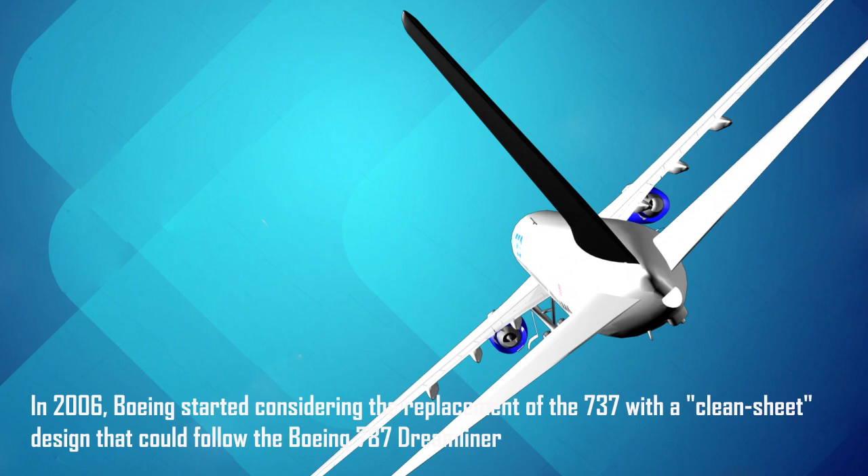Building of Boeing 737 MAX. In 2006, Boeing started considering the replacement for their 737 aircrafts with a clean sheet design. During that time, Dreamliner was in the anvil, and this new aircraft was supposed to follow that. The decision on this replacement was to be taken in 2011. The sales of Boeing 737NG, the MAX predecessor, was good. At the time of MAX launch, there was a backlog in excess of 3,000 aeroplanes. Then came the new re-engined Airbus A320.

On 1st December 2010, Airbus launched the 320neo with a LEAP 1A engine from CFM International, claiming fuel improvement of 20%. At the 2011 Paris Air Show, Airbus won about $72 billion worth of business for its 320neo for a total 730 aircrafts, setting a new record. At that time, Airbus had a backlog of 1,029 units since its launch.

On July 20, 2011, American Airlines announced an order for 460 narrow-body jets worth more than $38 billion. The order included 130 A320ceos and 130 A320neos and an intended order for 200 re-engined 737 with the CFM LEAP engines, breaking the long-standing monopoly that Boeing had with the airline.

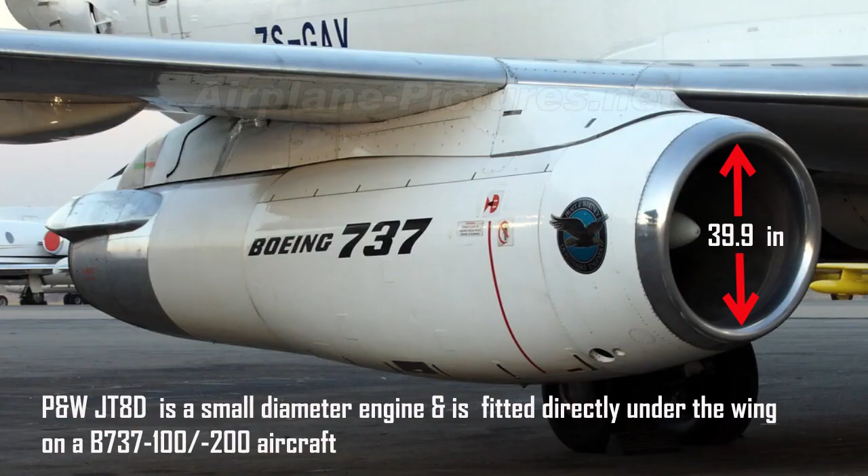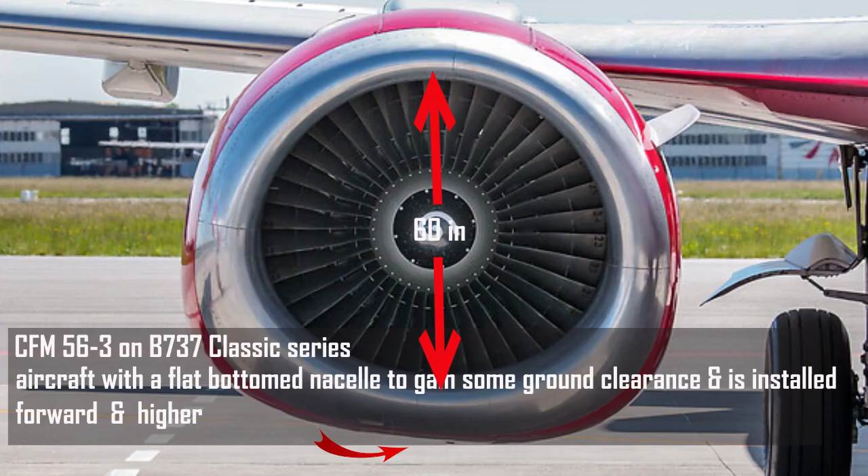In 1979, Boeing first faced the issue of installing larger diameter CFM 56-3 engines on its low wings when it re-engined the Boeing 737-100-200 into its classic series aeroplanes. The P&W JT8D is a small diameter engine and is fitted directly under the wing on a Boeing 737-100-200 aircraft. The CFM 56-3 engine on a Boeing 737 classic series aircraft has a flat-bottomed nacelle to gain some ground clearance and is installed forward and higher.

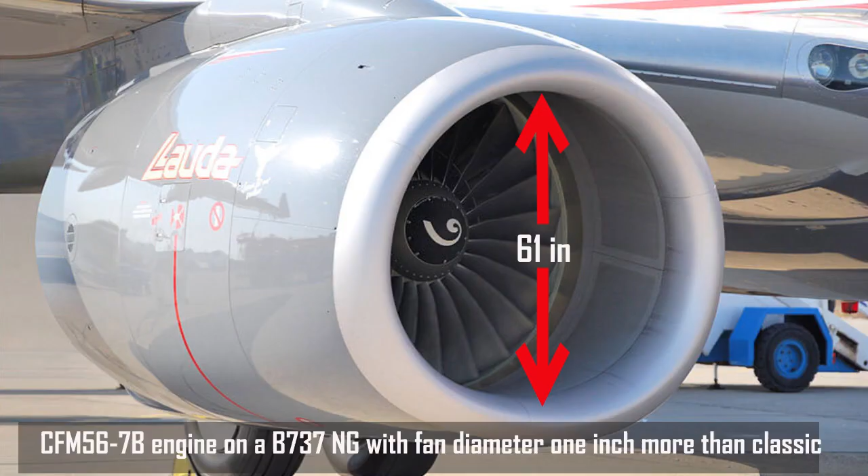For Boeing 737 NG aircraft, CFM 56-7B engines were selected. Its fan diameter is only 1 inch more than the classic engines, so there were no issues.

When Boeing wanted to install LEAP engines with a fan diameter of 69 inches on the MAX aircraft, they faced major problems. They did two things: the length of the nose landing gear was increased by 8 inches, and the engine was installed higher and much further forward.

Studies for additional drag reduction were performed during 2011 to catch up with Airbus in fuel efficiency. This included: first, a long and streamlined tail cone was introduced for natural laminar flow to reduce drag and improve fuel efficiency by 1%.

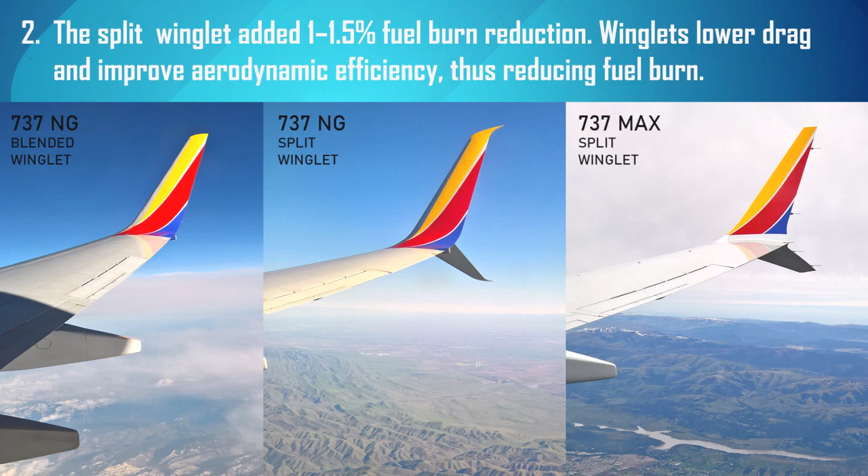Second, split winglets added 1 to 1.5% fuel burn reduction. Winglets lower drag and improve aerodynamic efficiency, thus reducing fuel burn.

Engine nacelle chevrons were introduced, which helped reduce engine noise by controlling how the core air mixes with the bypass air. This would allow several hundred pounds of sound insulation to be removed from the aircraft, making it lighter and more fuel efficient.

Fourth, the introduction of EBAS, the Electronic Bleed Air System, for cabin pressurization and aircraft ice protection, which will improve fuel burn.

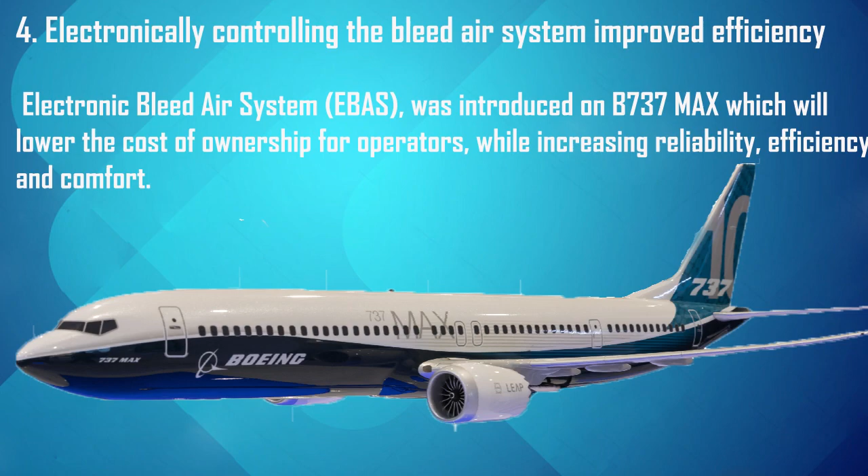Fifth, fly-by-wire spoilers. Boeing replaced the mechanical spoiler system with fly-by-wire spoilers in the 737 MAX to reduce weight and improve stopping distance.

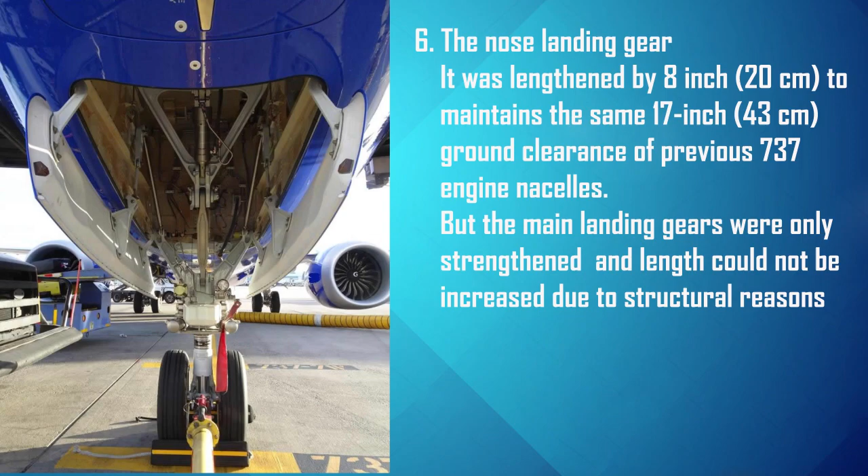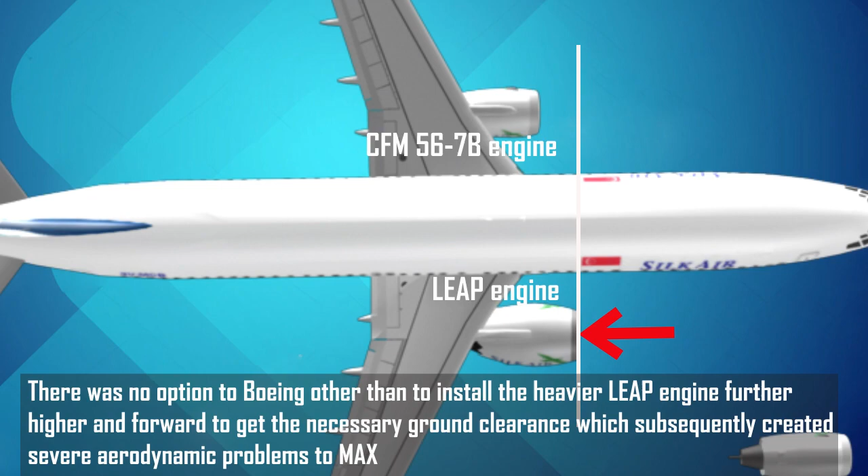The left side shows the NG engine and the right side shows the MAX engine. Boeing had no option but to install the heavier LEAP engine further forward and higher to get the necessary ground clearance, which subsequently created severe aerodynamic problems for the MAX.

In 2012, soon after launch, during internal tests, simulated high-speed wind-up turns showed aerodynamic interaction between the LEAP engine nacelle and the wing, creating a pitch-up tendency.

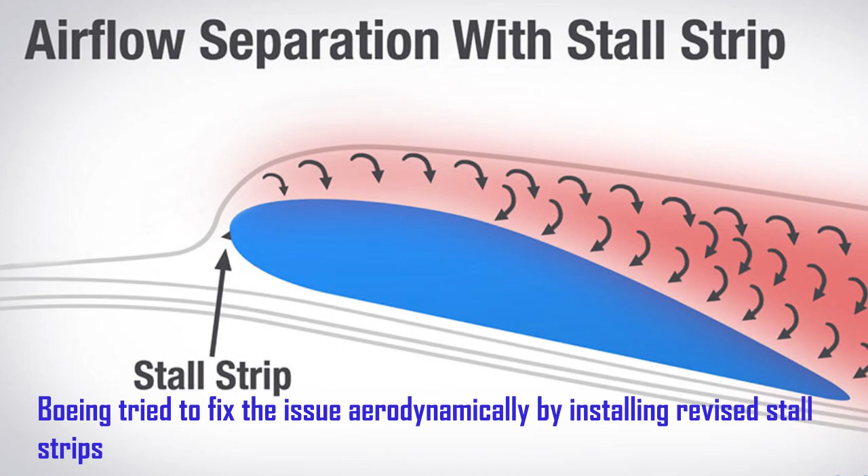Various remedial measures were taken by Boeing to avoid the pitch-up tendency aerodynamically. Boeing tried to fix the issue by installing revised stall strips.

Vortex generators: Boeing revised the vortex generator pattern. These can be seen installed on top of the wing to delay stall.

Vortilons were introduced, which allow flying at a higher angle of attack before stalling.

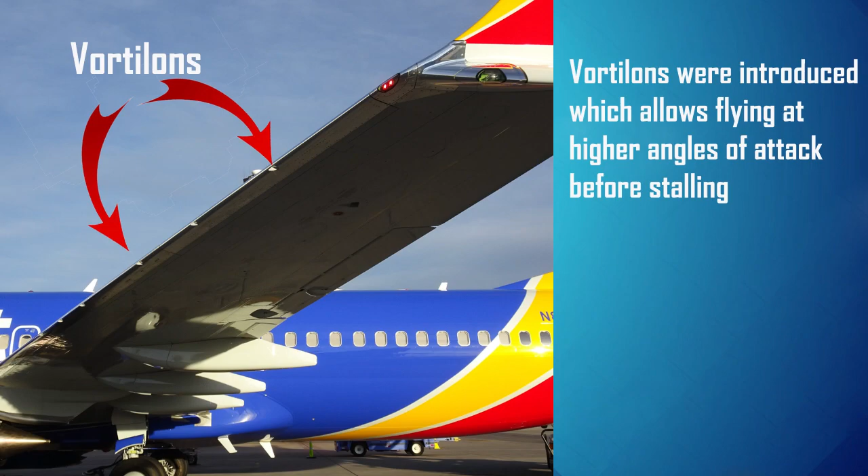A nacelle strake or chine was installed to prevent flow separation caused by the engine masking the wing at high angle of attack. This led to the introduction of the Maneuvering Characteristics Augmentation System, or MCAS.

Introduction of the Maneuvering Characteristics Augmentation System (MCAS). When all efforts failed to fix the problem aerodynamically, the solution Boeing arrived at was a piece of software, the Maneuvering Characteristics Augmentation System, or MCAS.

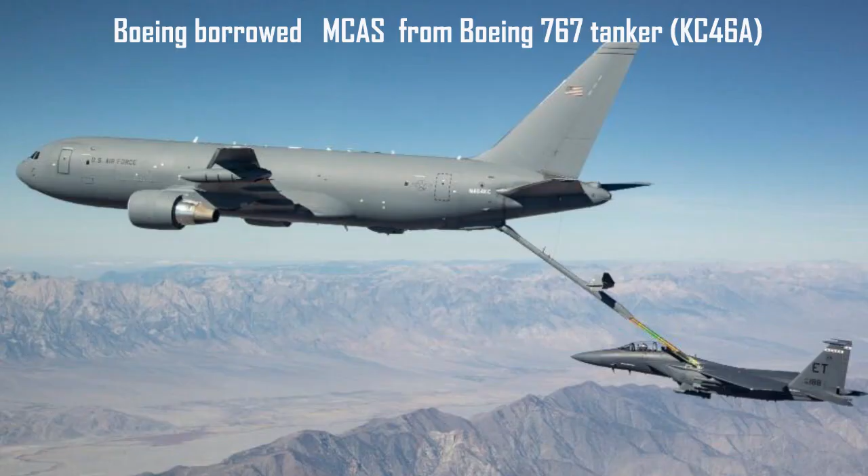Boeing borrowed MCAS from the Boeing 767 Tanker KC-46A. It is a safe system that has been used on the Boeing 767 Tanker for several years. The system was designed to operate only at extreme high-speed pitch-up conditions that are outside the normal operating envelope.

In 2016, flight testing revealed that the low-speed 1G handling was non-compliant with Part 25 of the CFR, the Code of Federal Regulations, dealing with stall characteristics.

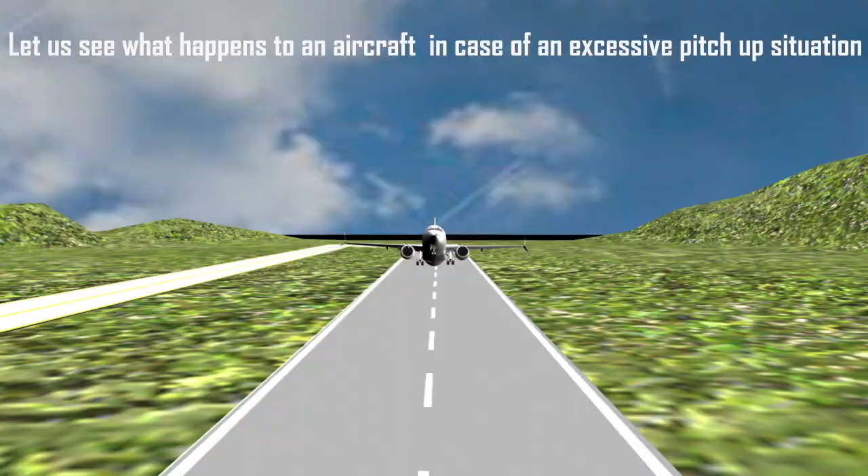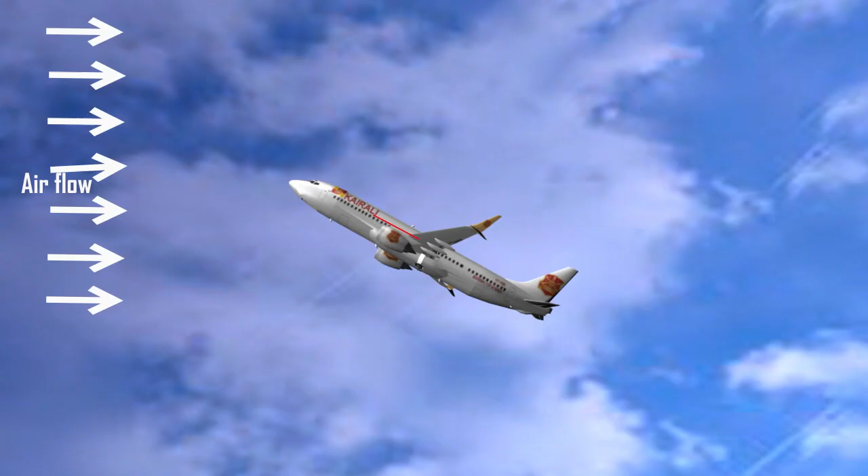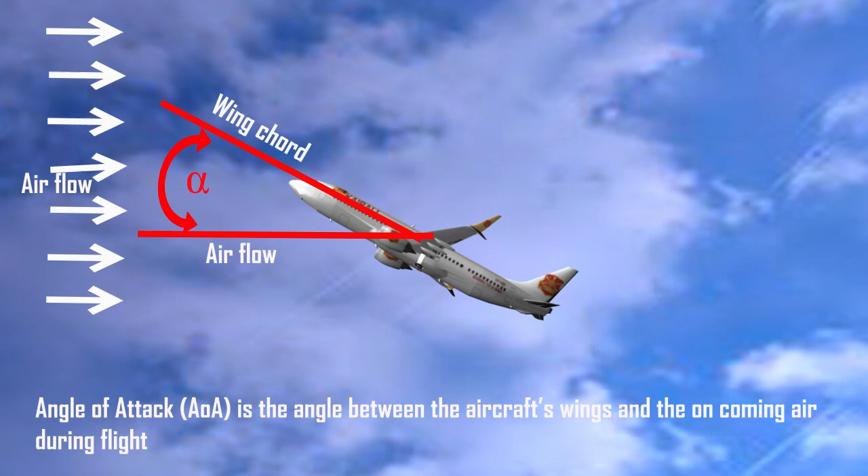Let us see what happens to an aircraft in case of an excessive pitch-up situation. The aircraft is climbing and the angle of attack is increasing. Angle of attack is the angle between the aircraft's wings and the oncoming air during flight. When the angle of attack is increased above a certain point, the airflow over the wings separates and the aircraft loses the lift produced by the wings. The aircraft stalls and falls out of the sky.

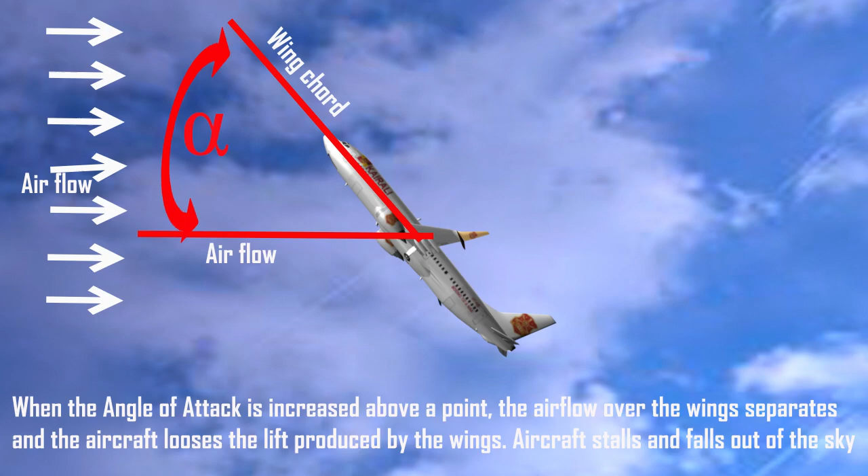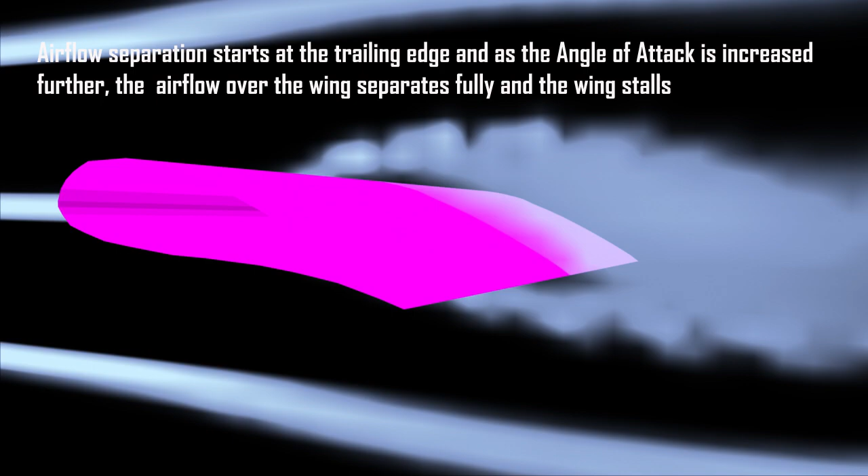This is the cross-section of a wing, and stalling is simulated here. Airflow separation starts at the trailing edge, and as the angle of attack is increased further, the airflow over the wing separates fully and the wing stalls.

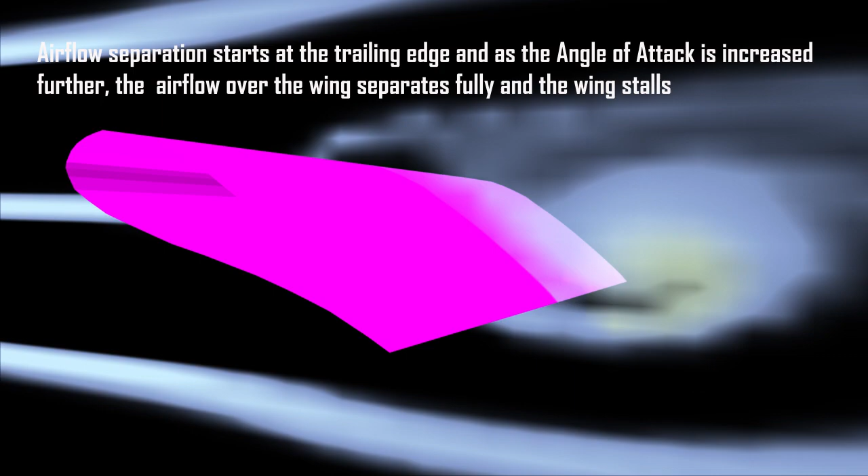What compelled Boeing to install the LEAP engine further forward and higher, instead of installing it directly under the wings by increasing the length of the main landing gear? Boeing had a valid reason for not increasing the length of the main landing gear.

It was also found that in some small areas of the flight envelope, such as approaching a stall and during higher G-force maneuvering, the new engine contributed to the control column feeling lighter.

All Boeing's attempts to counter this issue aerodynamically failed, and finally a software called MCAS was embedded in the flight control computer. Subsequently, two MAX aircraft were involved in catastrophic accidents due to the operation of MCAS after getting faulty signals from the angle of attack sensors.

The nose gear of MAX has been extended by 8 inches to increase the ground clearance for the larger diameter engines. There was no difficulty in increasing the nose gear length as it retracts forward.

The main gear sits between the wings and retracts inward into the wheel well cavity in the lower fuselage. Lengthening the main gear would require shifting the gear attachment points outward, otherwise the lengthened gear will not retract into the wheel well cavity. Lengthening the main gear struts means an almost complete structural redesign of the main wing structure, with consequences on cost, lead time, recertification, and weight increase.

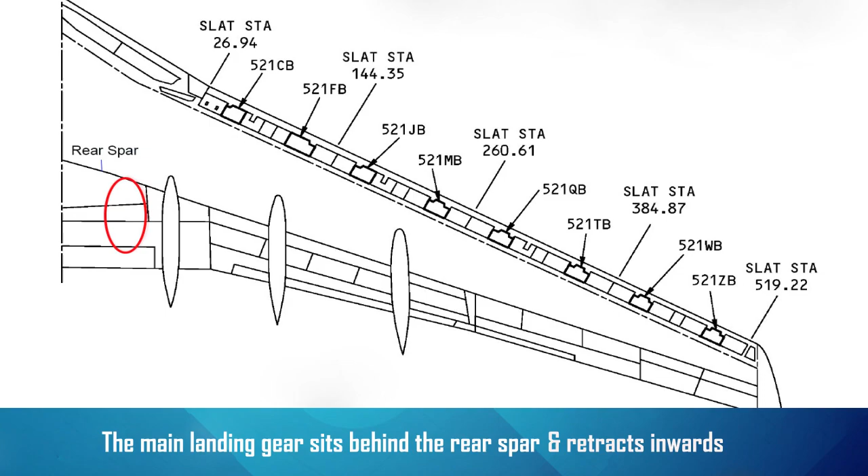The main landing gear sits behind the rear spar and retracts inwards. It is attached to the main landing gear support beam and to the wing rear spar. This shows the original landing gear position and retraction.

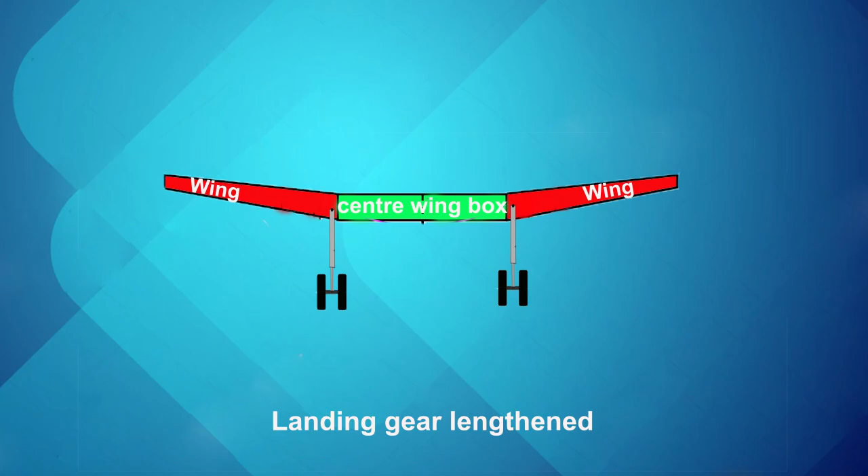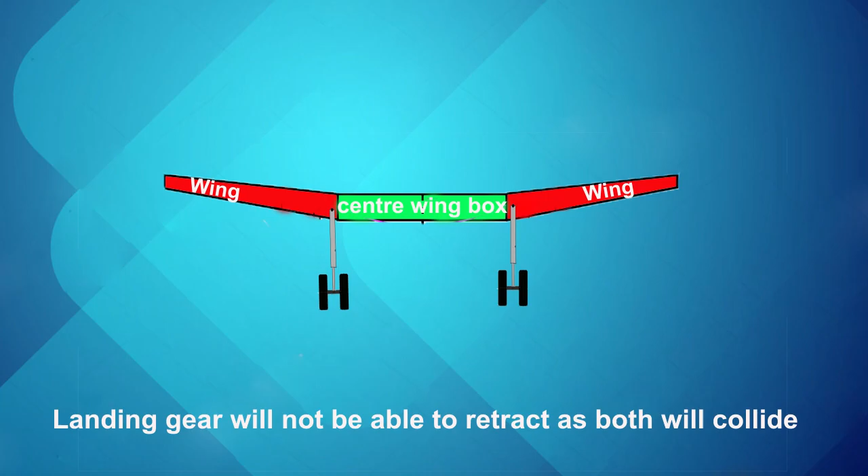Landing gear is lengthened now. Landing gear will not be able to retract as both will collide. Hinge points are moved outwards and retraction is possible now.

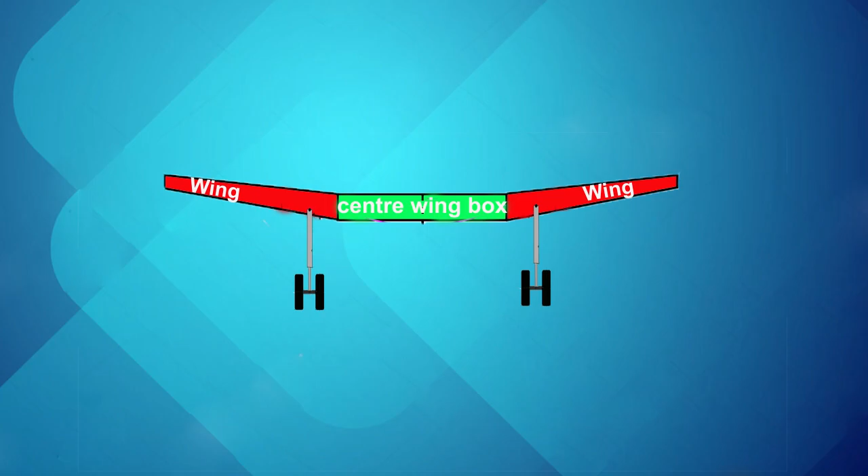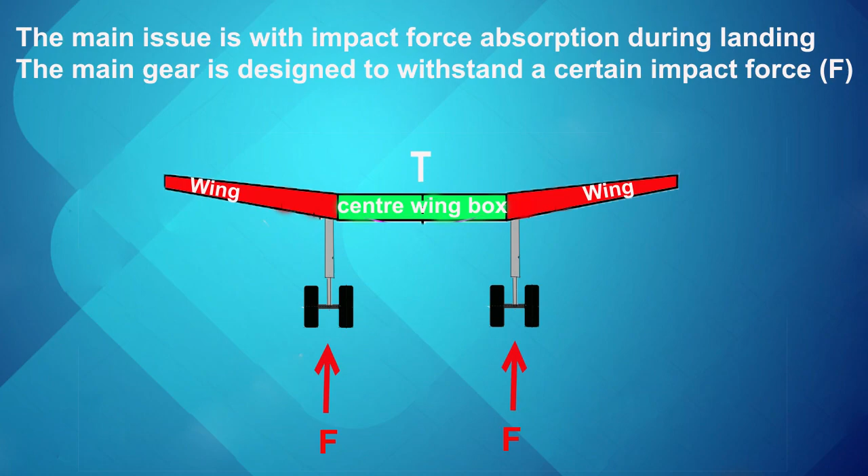The main issue is with impact force absorption during landing. The main gear is designed to withstand a certain impact force. If the distance from the center is increased, the impact torque T on the center wing box increases proportionally. Strengthening the center wing box has implications on the weight and the wing root thickness.

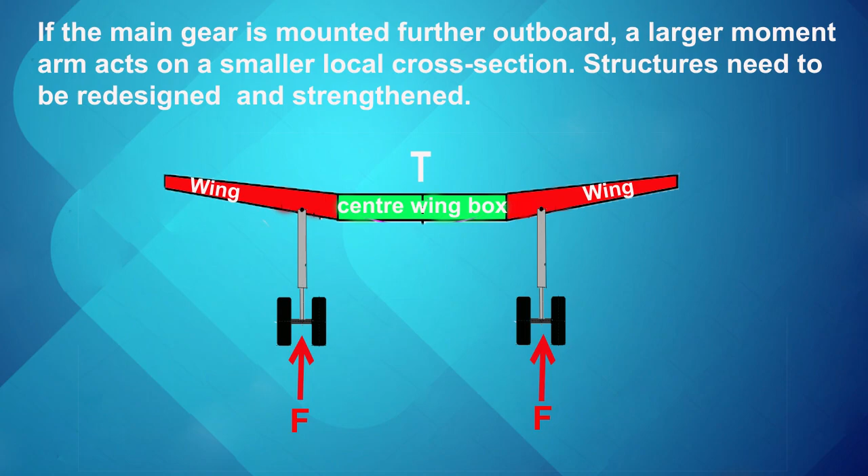If the main gear is mounted further outboard, a large moment arm acts on the smaller local cross-section. Structures need to be redesigned and strengthened. Redesigning the wing fuselage intersection is a major design effort in cost and delivery time. Boeing could not afford both, and hence lengthening of the landing gear was not feasible.

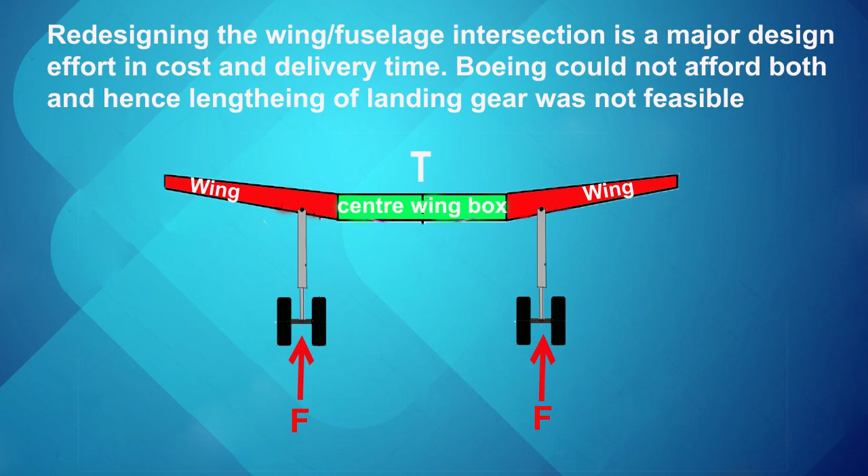In 2016, during the flight test program, it was found that in some small areas of the flight envelope, such as approaching a stall and during higher G-force maneuvering, the new engine contributed to the control column feeling lighter. For the control column to have a higher pull force feel in these flight regimes, Boeing decided to include an additional flight control law in the STS, part of the flight control software that provides required control force feel to the pilot. Thus, MCAS function was added.

STS, speed trim system, is part of the flight control computer and is used to augment the airplane's speed stability during certain low speed, high thrust flight conditions like takeoff or go-around. It does this by moving the horizontal stabilizer during manual flight.

MCAS is a software embedded in the flight control computer to automatically command the airplane's nose-down stabilizer to enhance pitch characteristics. Duration of the MCAS command is a function of angle of attack and airspeed. MCAS authority over the horizontal stabilizer was increased from 0.6 degrees to 2.5 degrees per cycle. This was needed because the original scope of MCAS was limited to high speeds; when it was adapted for low speeds, the change was required.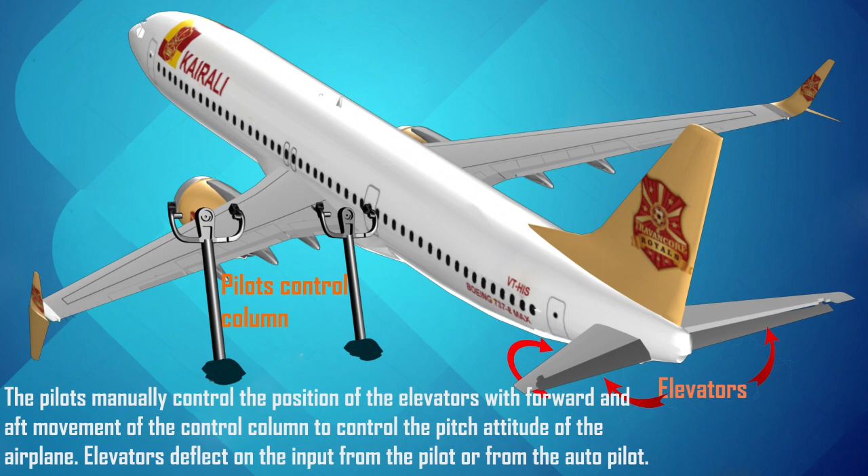Pilots manually control the position of the elevators with forward and aft movement of the control column to control the pitch attitude of the aeroplane. Elevators deflect on inputs from the pilot or from the autopilot. The trimmable horizontal stabilizer, or THS, assists the elevators and can be moved to certain angles both up and down. Elevators are also mounted to the THS and move along with it. The pilot can operate the stabilizer electrically using the control wheel trim switches, or manually move the stabilizer through cables by turning the stabilizer trim wheels.

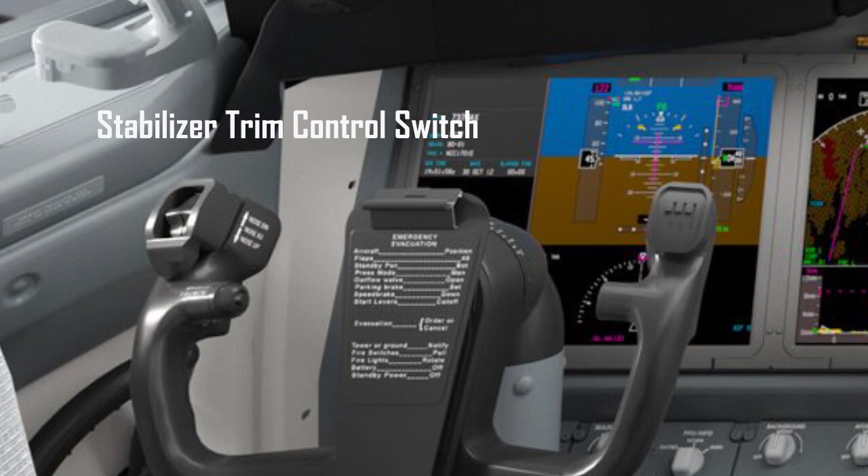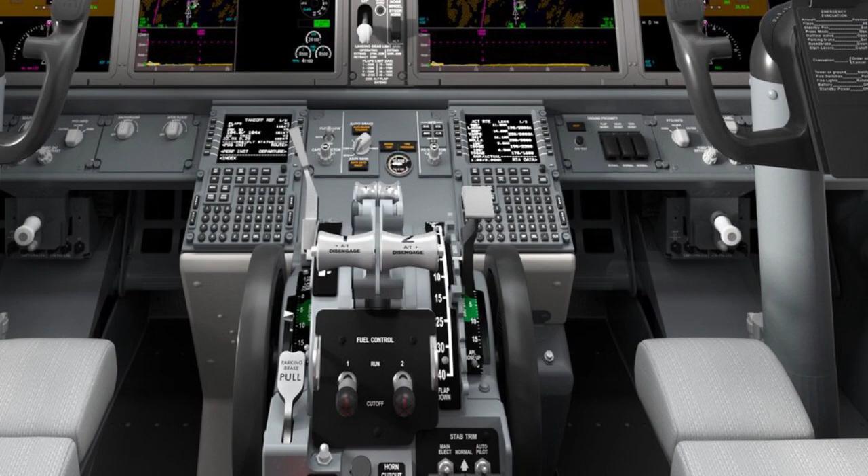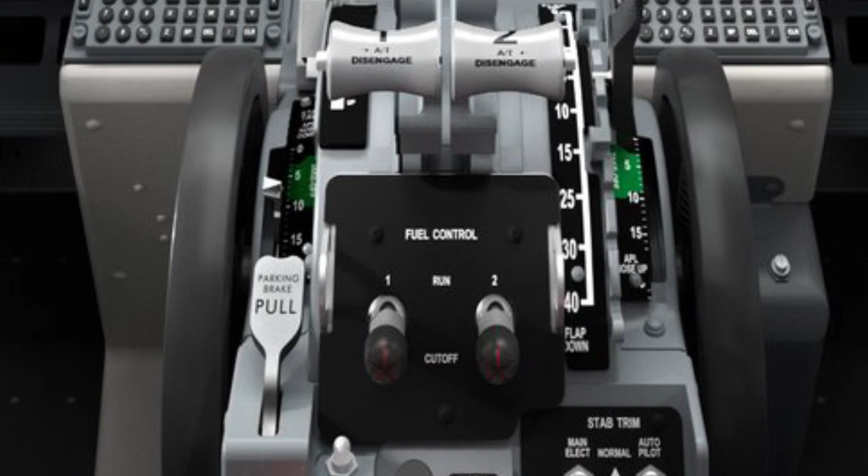We will go inside the 737 MAX flight deck, showing the stabilizer trim control switch, the stabilizer manual control wheels, and the stabilizer trim cutout switch.

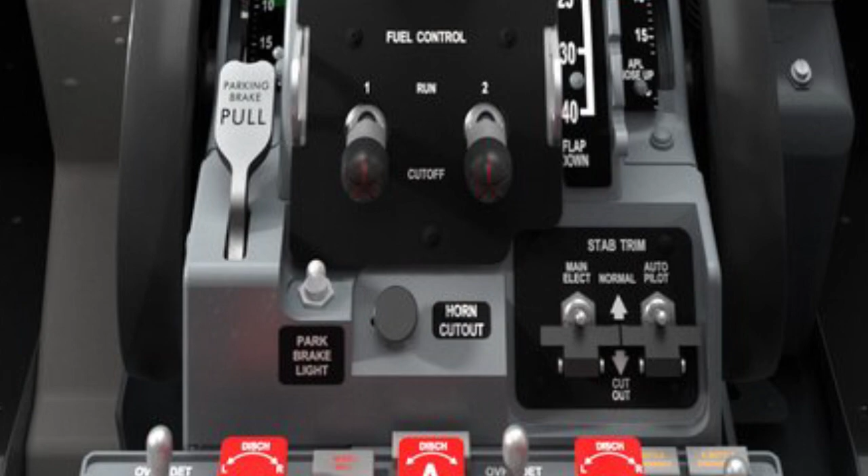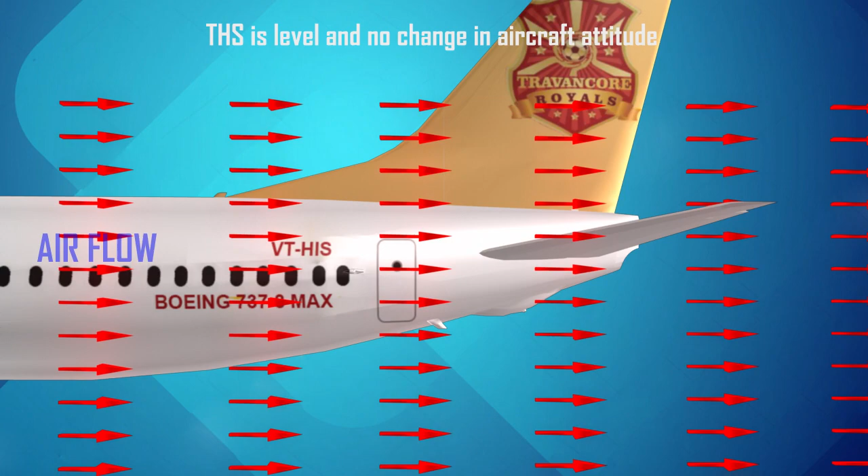The trimmable horizontal stabilizer, or THS, is moved by a jack screw located in the tail section of the aircraft. The airplane's longitudinal trimming is achieved with the help of the THS, which trims the airplane to maintain a particular attitude, such as straight and level flight, a constant climb, or a constant descent, without any control surface input. This is achieved by adjusting the THS, thus reducing the pilot's workload. The THS is adjusted by the pilot or by the autopilot as required. When air flowing over the stabilizer is level, there is no change in the aircraft's attitude. If the THS is deflected upwards, the airplane's tail goes up and the nose goes down.

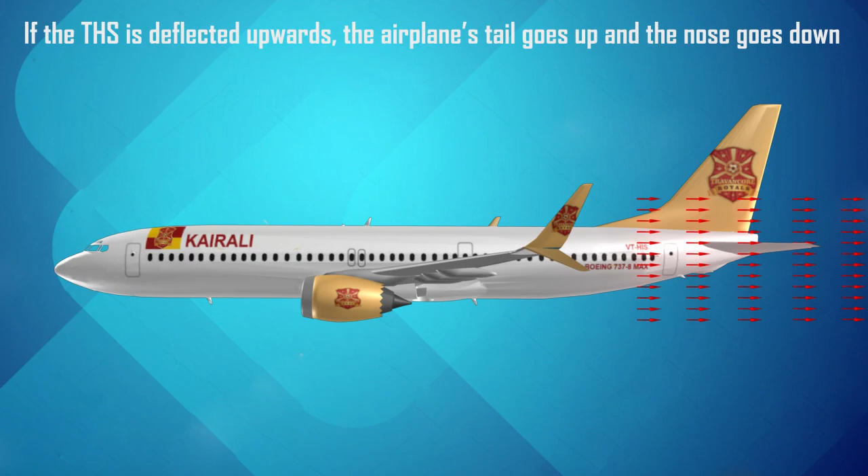If the THS is moved downwards, the tail goes down and the nose goes up.

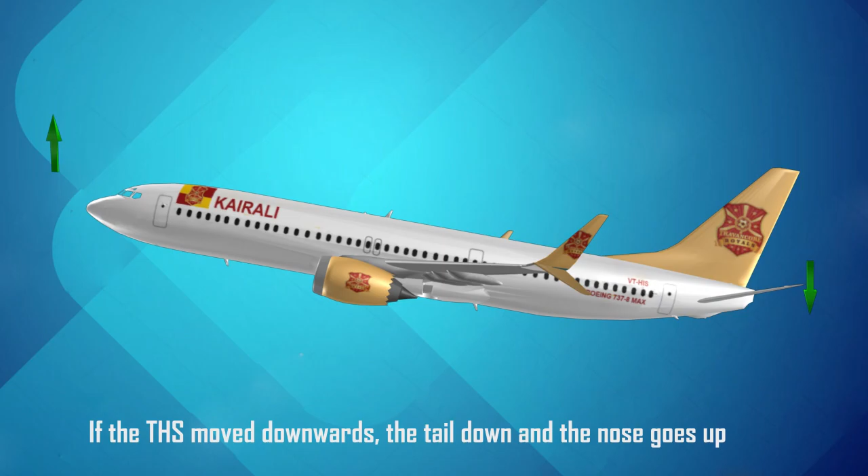The MCAS function becomes active when the angle of attack exceeds the threshold based on the airspeed and altitude. Let us see how the angle of attack sensor works. In level flight, the angle of attack sensor vane will be level as it aligns with the airflow. When the airplane's angle of attack is increased to a high level, the sensor's vane rotates, and this signal showing impending stall will trigger the MCAS.

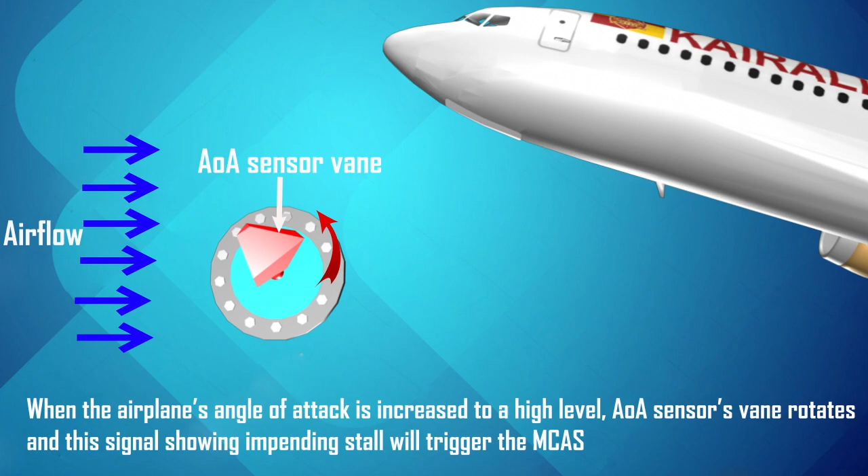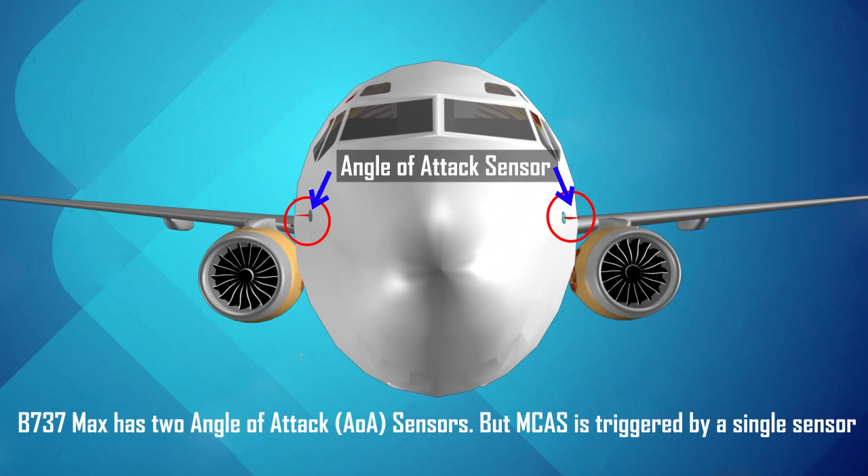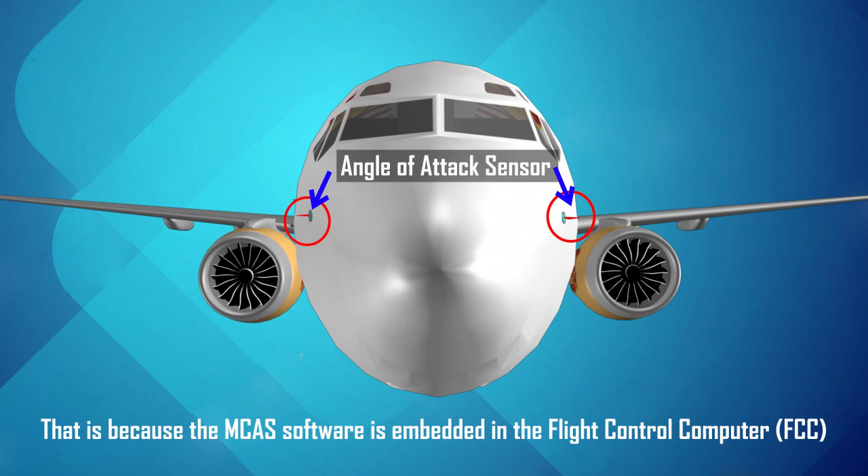Boeing 737 MAX has two angle of attack sensors, but the MCAS is triggered by a single sensor. This is because the MCAS software is embedded in the flight control computer, and only one FCC is active at a given flight. The FCC flip-flops between flights: in the first flight of the day, if FCC 1 is in operation, the next flight it will be FCC 2.

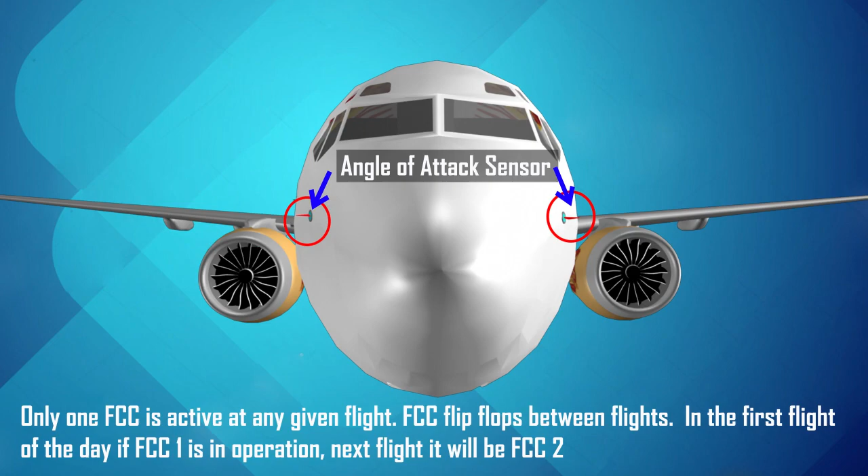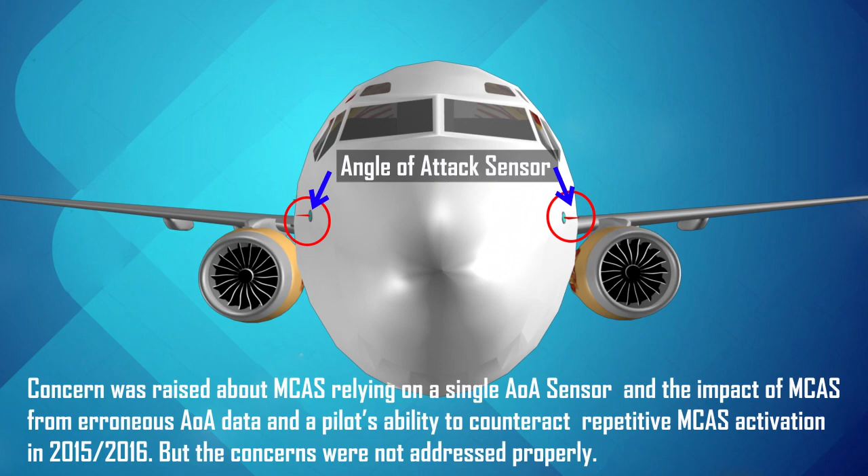The LH angle of attack sensor feeds FCC 1, and the RH angle of attack sensor feeds FCC 2. Concern was raised about MCAS relying on a single angle of attack sensor, and the impact of MCAS from erroneous angle of attack data, and a pilot's ability to counteract repetitive MCAS activation, back in 2015-2016 itself. But the concerns were not addressed properly.

Activation trigger from a single angle of attack sensor: in case of a faulty sensor, MCAS can kick in with dangerous consequences. It would continue to cycle 10 seconds on and 5 seconds off, as long as the angle of attack sensor gives a high angle of attack condition of the aeroplane to the MCAS. MCAS movement of the stabilizer cannot be stopped with opposite control column movement, as in the Boeing 737 NG.

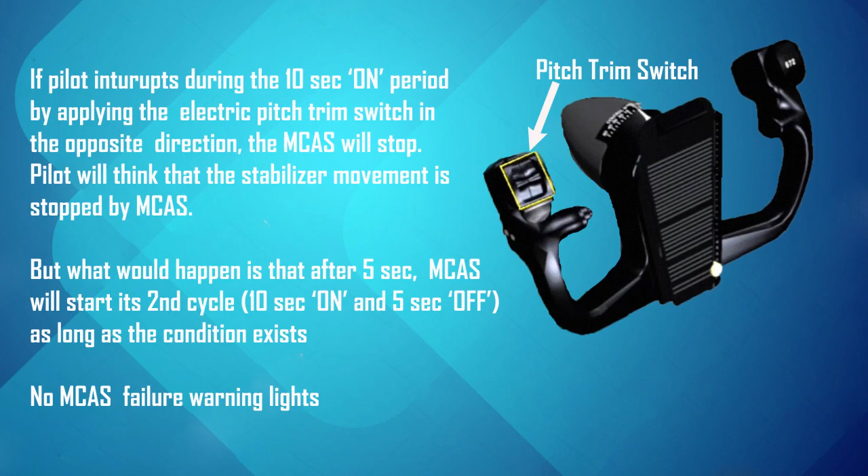If the pilot interrupts during the 10 seconds on period by applying the electric pitch trim switch in the opposite direction, the MCAS will stop. The pilot will think that the stabilizer movement is stopped by the MCAS. But what would happen is that after 5 seconds, MCAS will start its second cycle, 10 seconds on and 5 seconds off, as long as the condition exists. And there are no MCAS failure warning lights.

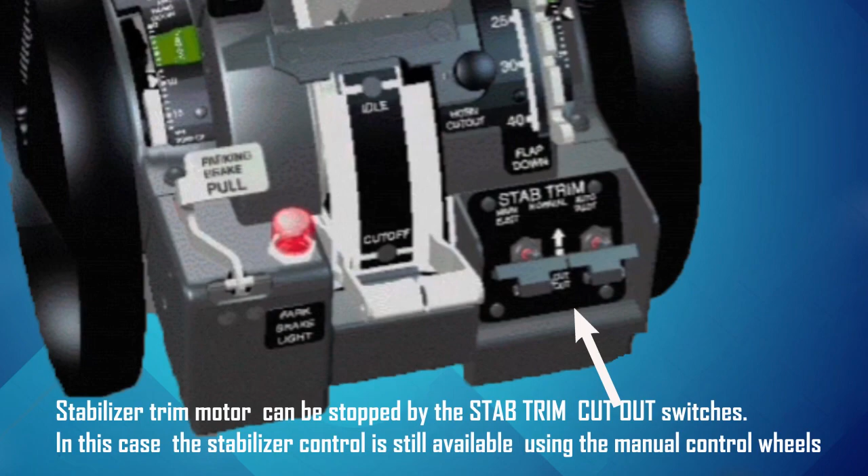The stabilizer trim motor can be stopped by the stabilizer trim cutout switches. In this case, the stabilizer control is still available using the manual control wheels.

On all previous 737 models, if the stabilizer was being moved either by electric pitch trim, the autopilot, or by the STS, speed trim system, moving the control column in the opposite direction would stop the stabilizer trim motor. But on the 737 MAX, because MCAS needed to move the stabilizer in opposition to control column movement, the control column cutout function was inhibited when MCAS was active, allowing airplane nose-down stabilizer motion with airplane nose-up control column input. MCAS schematic diagram.

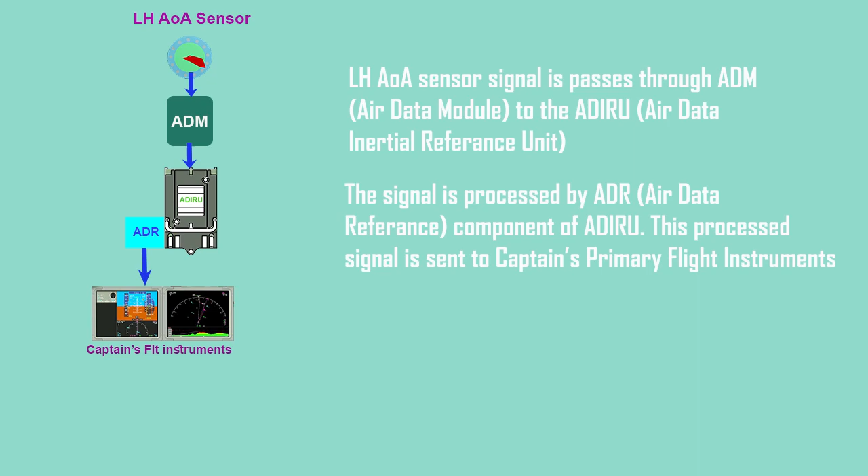The LH angle of attack sensor signal is passed through the ADM to the ADIRU. The signal is processed by the ADR, which is a component of ADIRU. This processed signal is sent to the captain's primary flight instruments. Another function of ADIRU is to supply air data, that is airspeed, angle of attack, and altitude signals, to the autopilot and to the flight control computer.

Both the NG and MAX include a speed trim system that automatically moves the horizontal stabilizer in response to changes from the trimmed airspeed while in manual flight, for speed stability. The stabilizer speed trim function, or STS, is part of the FCC. MCAS was added to STS to improve the aerodynamic pitch effects associated with the 737 MAX's larger, more forward-located engines, when in manual flight, with the flaps up, at elevated angles of attack.

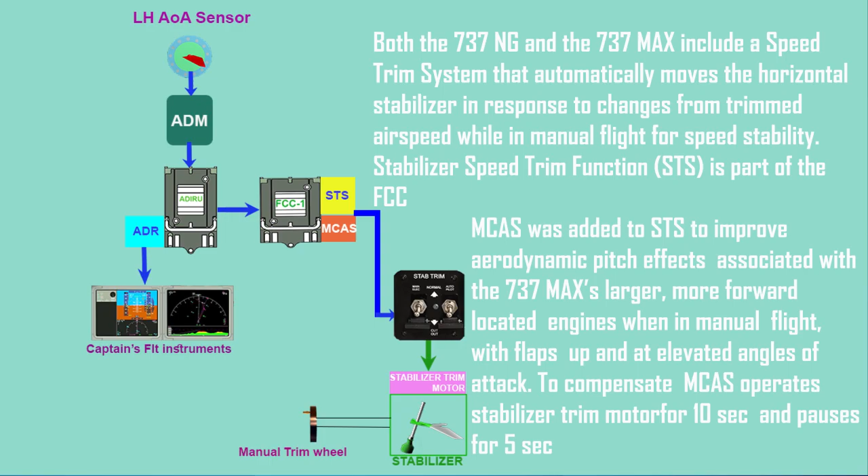To compensate for this, MCAS operates the stabilizer trim motor for 10 seconds and pauses for 5 seconds. The MCAS signal passes through the stabilizer trim cutout switches to the stabilizer trim motor. The stabilizer trim motor can be stopped by switching off the stabilizer trim cutout switches. Let us see the RH side.

The RH angle of attack sensor signal passes through its ADM to the corresponding ADIRU. The ADIRU's ADR supplies the processed signal to the first officer's flight instruments, and the ADIRU also supplies to FCC number 2.

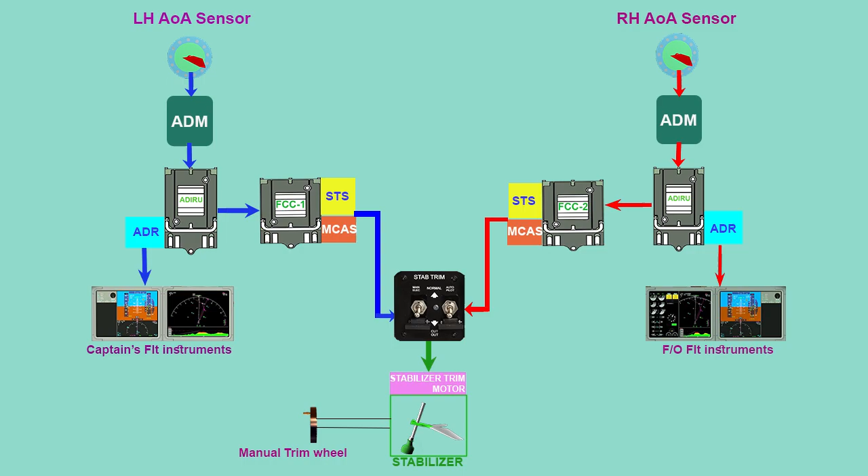The stabilizer speed trim system is part of the FCC, and MCAS is added to the STS. The Boeing 737 has 2 FCCs, but only one is active on a flight. The active FCC flip-flops between flights, starting from FCC 1 and the next flight FCC 2.

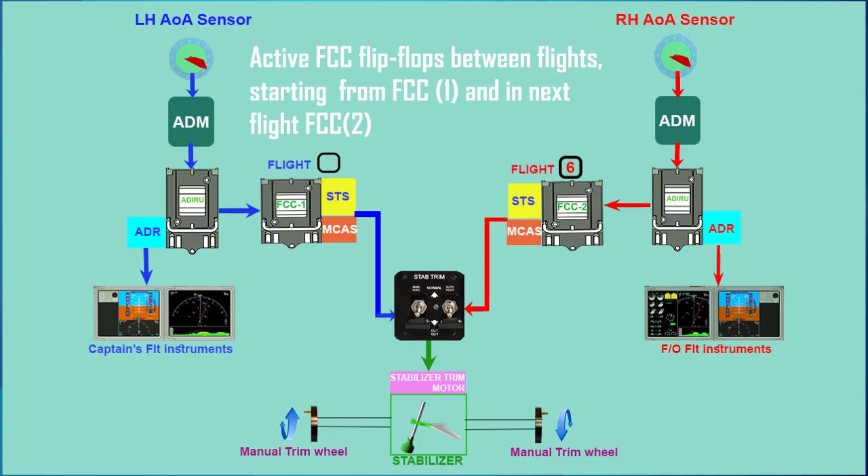So if the LH sensor overreads on the first flight, it will trigger MCAS, as it happened in both 737 MAX accidents. Both accident flights were the first flight of the day. If the fault was on the RH angle of attack sensor, it would not have triggered MCAS—it would have only affected the first officer's flight instruments.

On December 8, 2015, the first 737 MAX, named Spirit of Renton, was rolled out of the factory. The Boeing 737 MAX maiden flight was on January 29, 2016.

Lion Air and Ethiopian Airlines flight accidents. Lion Air PKLQP, a Boeing 737 MAX, the airplane involved in the accident on 29 October 2018, experienced problems with its airspeed indication on the previous 4 flights.

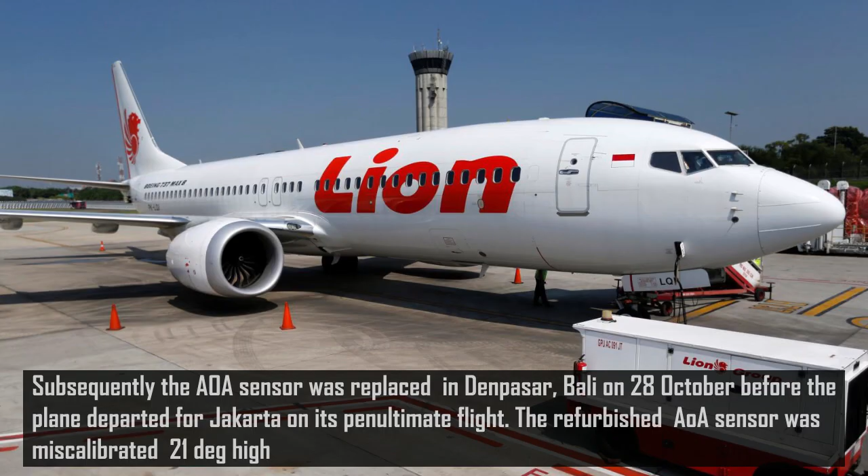Subsequently, the angle of attack sensor was replaced in Denpasar, Bali on 28 October before the plane departed for Jakarta on its penultimate flight. The refurbished angle of attack sensor was miscalibrated 21 degrees high.

On 28/10/2018 night, Lion Air Boeing 737 MAX PKLQP took off from Denpasar, Bali to Jakarta. Stick shaker activated as soon as the airplane was airborne, and IAS disagree and ALT disagree warnings and the feel differential pressure light illuminated, followed by MCAS activation when the flaps were fully retracted.

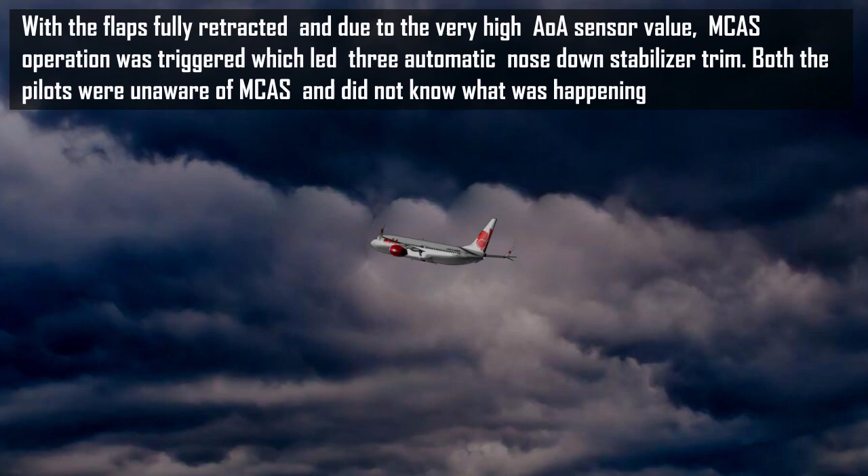With the flaps fully retracted and due to the very high angle of attack value, MCAS operation was triggered, which led to 3 automatic nose-down stabilizer trim events. Both pilots were unaware of MCAS and did not know what was happening.

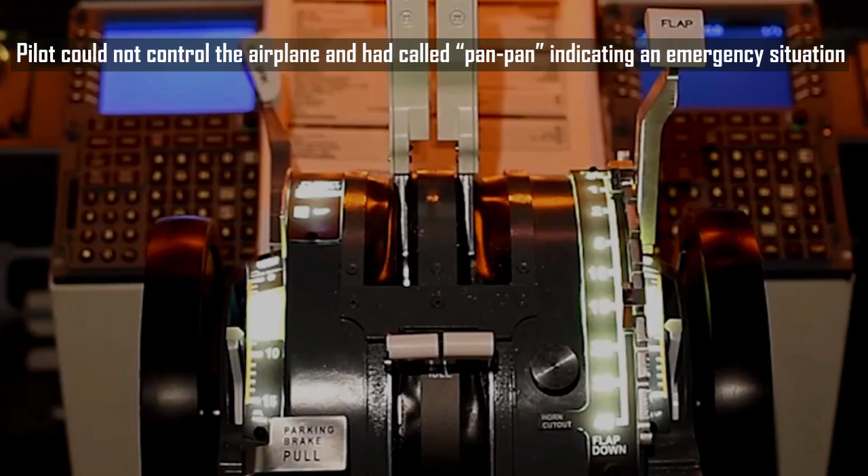The pilot could not control the airplane and had called pan pan, indicating an emergency situation.

There was a third pilot sitting on the observer seat, and he noticed that the stabilizer trim wheels were spinning uncommandedly. He told the pilots flying to switch off the stabilizer trim cutout switch, which fixed the issue. The pilot cancelled the pan and continued the flight to Jakarta and landed safely.

On 29/10/2018, the next day morning, the airplane was ready for flight. The previous flight's tech log entry made by the pilots read like this: IAS and ALT disagree shown after takeoff and feel differential pressure light illuminated.

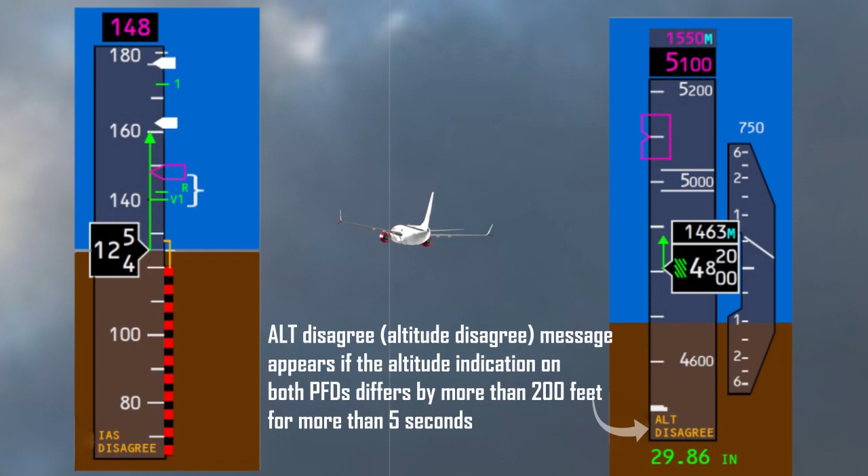Altitude disagree appeared. The altimeter on the captain's PFD indicated 340 feet and the FO's PFD indicated 570 feet. The altitude disagree message appears if the altitude indication on both PFDs differs by more than 200 feet for more than 5 seconds.

The indicated airspeed disagree message appears if the airspeed indication on both PFDs differs by more than 5 knots for more than 5 seconds.

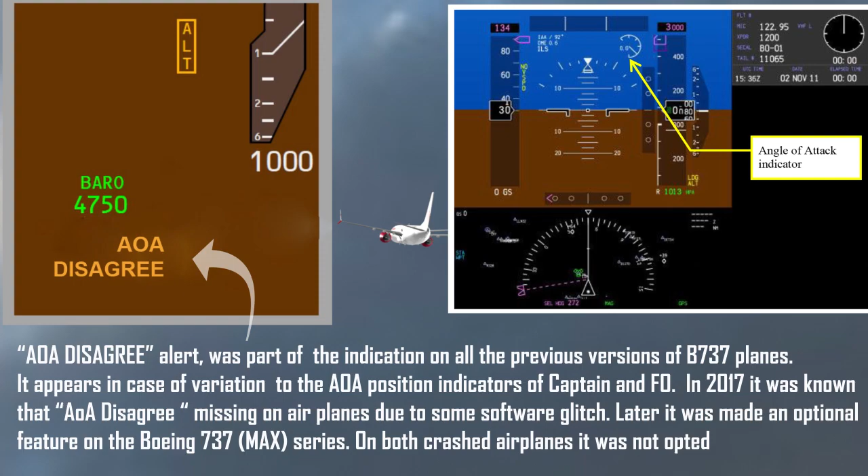Angle of attack disagree alert was part of the indication on all the previous versions of Boeing 737 airplanes. It appears in case of variation between the angle of attack position indicators of captain and FO. In 2017, it was known that angle of attack disagree was missing on airplanes due to some software glitch. Later, it was made an optional feature on the Boeing 737 MAX series.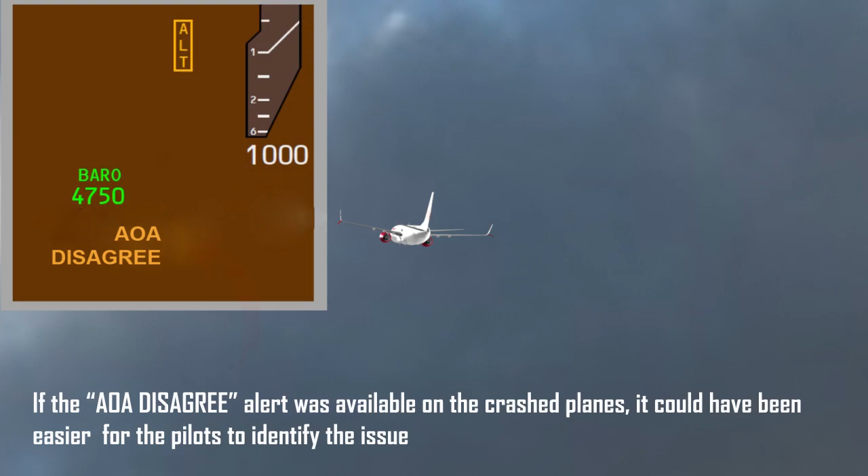On both crashed airplanes, it was not opted for. If the angle of attack disagree alert was available on the crashed airplanes, it could have been easier for the pilots to identify the issue.

Now the question is, why did the IAS disagree and ALT disagree alerts appear when the issue was with the angle of attack value difference between LH and RH sensors? Let us go to the MCAS schematics once again.

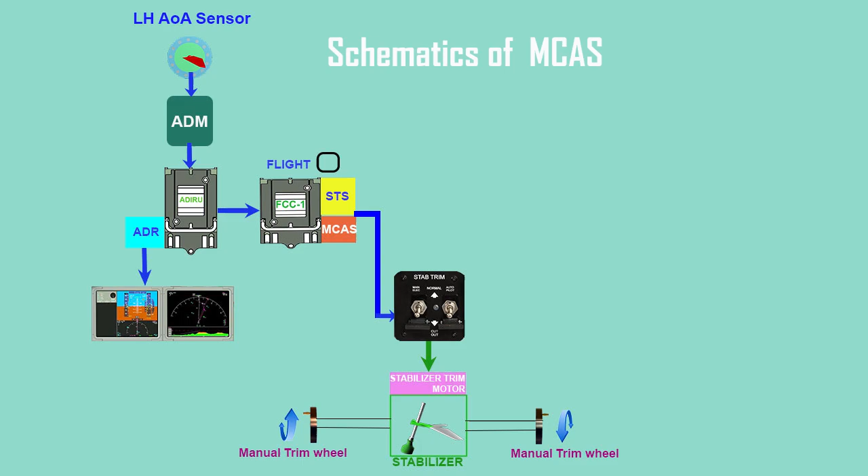Pitot static and total air temperature sensors feed into their own ADMs, where it is converted to numerical information and provided to the ADIRU. The air data reference function of the ADIRU processes the signal and applies a static source error correction to indicated airspeed and altitude.

An error in the angle of attack value will affect the indicated airspeed and altitude of the respective side, and hence cause the IAS disagree and ALT disagree alerts.

The Lion Air aircraft started to turn to the left. The aircraft's GPWS sounded bank angle. The captain's altimeter indicated 1310 feet and the first officer's indicated 1540 feet.

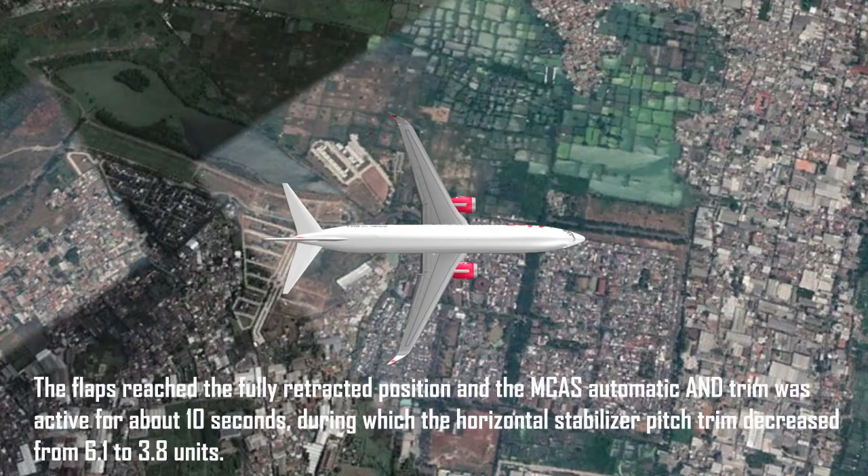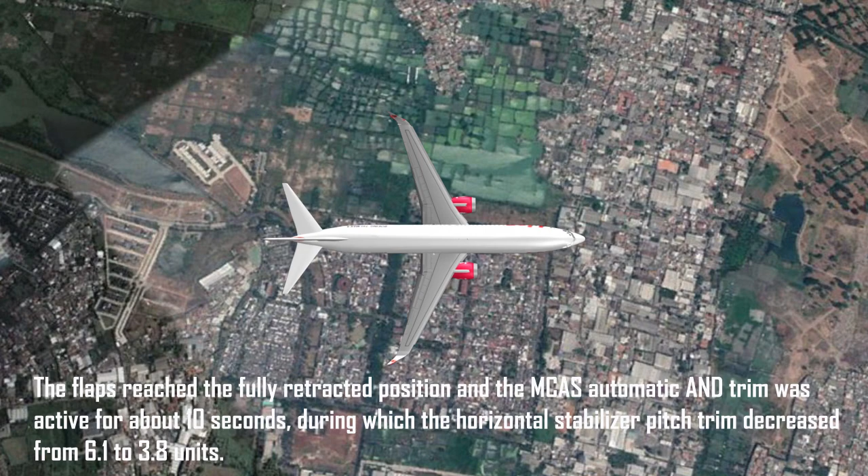Pilot selected the flap to 0 position. The flaps reached the fully retracted position and the MCAS automatic nose-down trim was active for about 10 seconds, during which the horizontal stabilizer pitch trim decreased from 6.1 to 3.8 units.

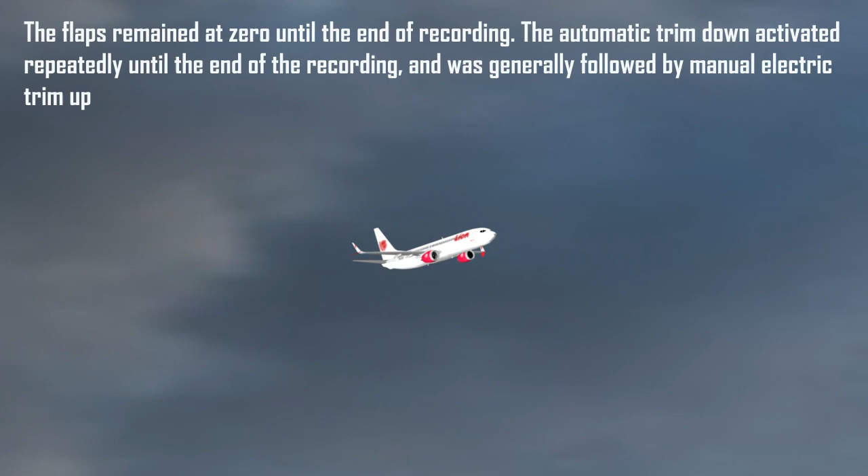The flaps remained at 0 until the end of recording. The automatic trim down activated repeatedly until the end of the recording, and was generally followed by the manual electric trim up.

From the time the flaps were set to 0 until the end of the recording, there were at least 26 automatic trim down commands and at least 34 manual trim up inputs.

After repeated operation of MCAS, the plane crashed into the sea at high speed.

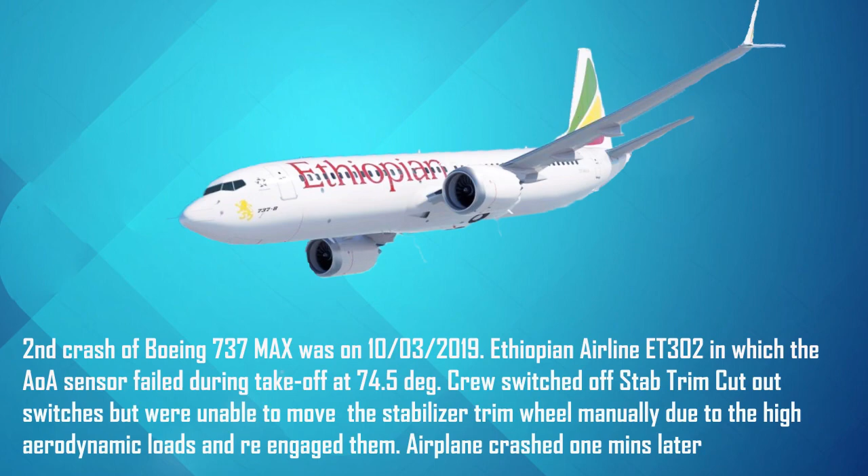This led to the grounding of Boeing 737 MAX airplanes all over the world. The second crash of the Boeing 737 MAX was on March 10, 2019, Ethiopian Airlines flight ET302, in which the angle of attack sensor failed during takeoff at 74.5 degrees.

The crew switched off the stabilizer trim cutout switches but were unable to move the stabilizer trim wheel manually due to the high aerodynamic loads, and re-engaged them. The airplane crashed one minute later.

The early observation was that pilot error was the main contributing factor in both accidents. All 346 people on board in both flights perished. On March 18, 2019, all 387 Boeing 737 MAX aircraft in service were grounded.

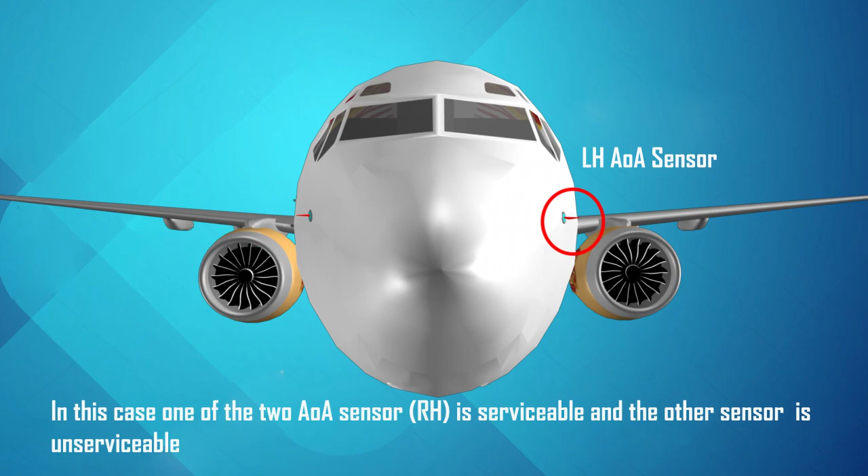Changes were made to the 737 MAX before it was released to fly again. In this case, one of the two angle of attack sensors, the right-hand one, is serviceable and the other sensor is unserviceable.

The flight control system will now compare inputs from both angle of attack sensors. If the sensors disagree by 5.5 degrees or more with the flaps retracted, MCAS will not activate. An indicator on the flight deck display will alert the pilots.

Both angle of attack sensors will be used now. An angle of attack split vane monitor and middle vane selector have been added to prevent MCAS from using angle of attack inputs which differ from the other angle of attack input by more than 5.5 degrees.

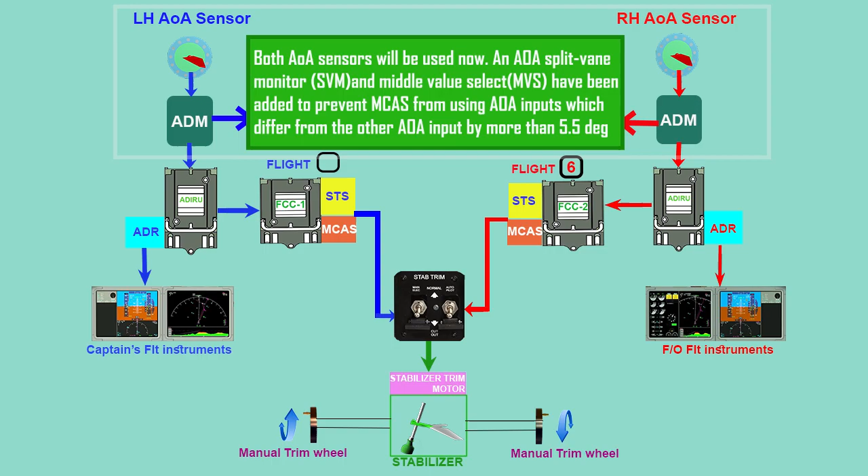Both flight control computers, FCCs, will be in use for MCAS operation. Boeing will introduce a third synthetic angle of attack sensor in the future.

Another change made is in the flight control computers. Dual processor monitors and cross-FCC monitors were introduced. The MCAS maximum control limit has also been reduced.

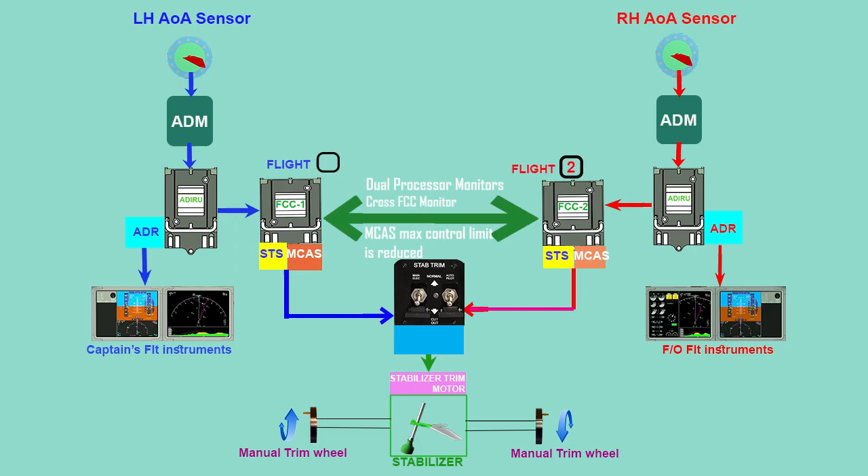The control column cutout function, which was there in the earlier versions of Boeing 737 and which was modified for MCAS, is now being restored.

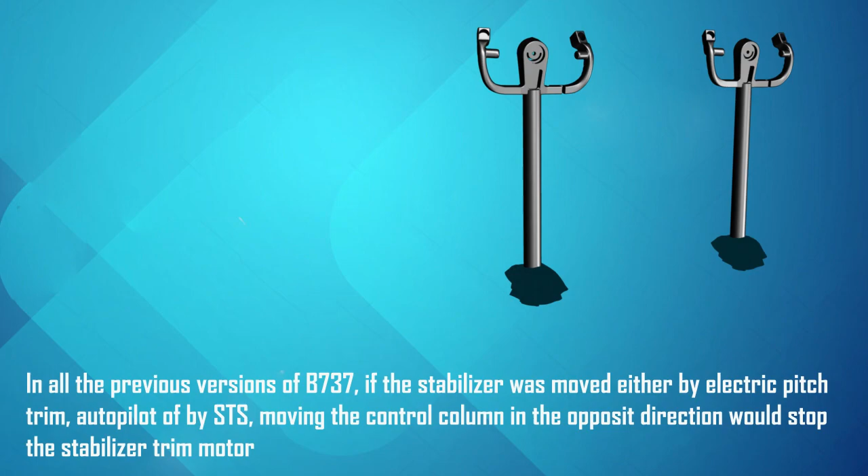In all previous versions of the Boeing 737, if the stabilizer was moved either by electric pitch trim, autopilot, or by STS, moving the control column in the opposite direction would stop the stabilizer trim motor.

But on the MAX, the control column cutout function was inhibited when MCAS was active. This was done because MCAS needed to move the stabilizer in the opposite direction to the control column movement.

Now, MCAS will only be activated once, and MCAS will never override the pilot's ability to control the airplane using the control column alone.

If a failed angle of attack sensor circuit is detected, the FCC will only utilize the valid angle of attack sensor value to control MCAS. The split vane monitor and MVS integrator will be bypassed.

If the split vane monitor detects a difference in angle of attack sensor readings greater than 5.5 degrees for a specified period, the MCAS and STS functions will be disabled for the remainder of the flight.

Actions were taken other than fixing MCAS. MCAS details were added to the Flight Crew Operating Manual, Aircraft Maintenance Manual, and Fault Isolation Manual.

Eight QRH procedures were revised. The Airplane Flight Manual limitations were revised for autopilot single channel operation.

Ten MMEL restrictions were added. Pilot type conversion training was also added to cover STS and MCAS, crew procedures, and related software changes.

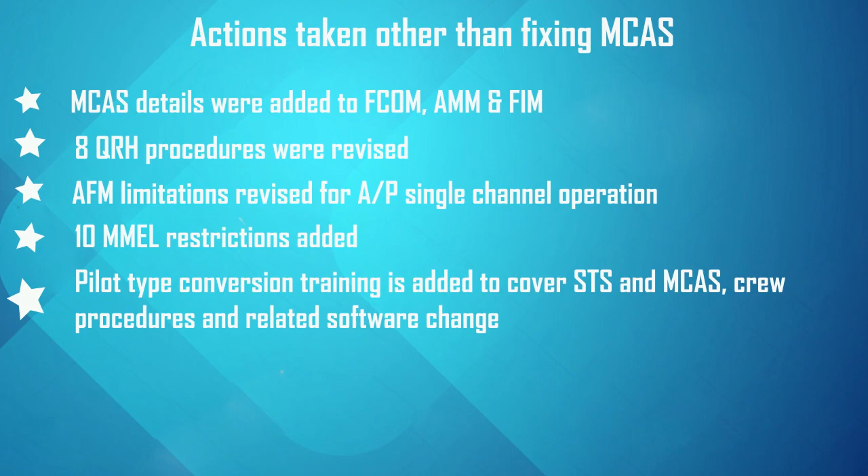The CDS software was updated to make the angle of attack disagree alert standard on all aircraft, with a free option to have an angle of attack display.

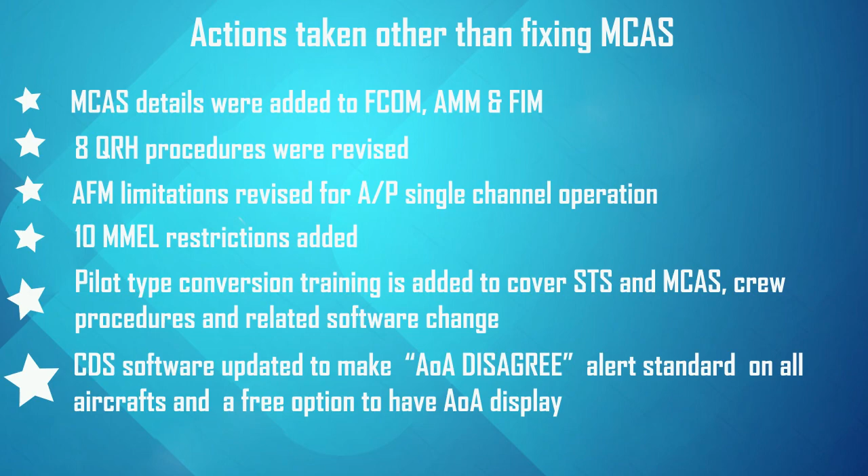After making the necessary changes to the Boeing 737 MAX, the FAA cleared the airplane to fly again. American Airlines flew from Miami to New York on November 18, 2020.